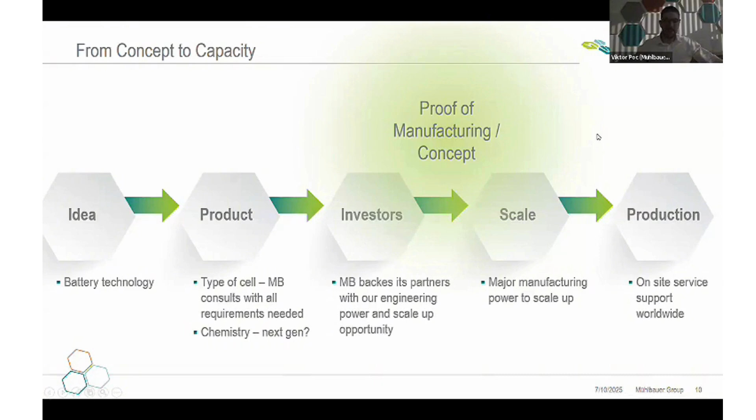So how we would like to fill up this gap in terms of, from the perspective of equipment builders, is we would like to focus on mitigation points within the battery production or the assembly of the battery cells. So I'd like to walk you through some of the main risks which we have encountered in the process of request to scale up some of our battery partners.

So at the very early stage, what we see in terms of process challenges is a lack of know-how, lack of experience of building the battery cells. Please imagine, we see a lot of partners coming with lack of experience in producing their own cell in high volumes. They usually produce the cells in a semi-automated fashion or even a manual fashion, whereas we are coming into the scale-up procedures given specification of the battery cell, but having no experience in actually building that cell.

So what we'd like to bring on the table is to offer all our equipment, which we have right now in our special lab, where we can cover all the processes of battery production, from notching until filling for pouch and prismatic, to basically showcase our partners that this is the way how we will bring you to the scale and to the target capacity which you require.

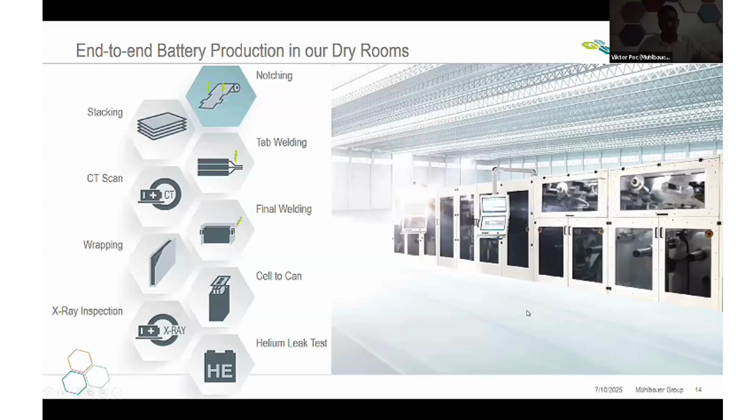In terms of stacking, by the way, just to not forget - all of what I'm going to say is available in production in our facilities. So don't misunderstand, this is not a presentation and a PPT, but those are real machines which are in production in our dry room.

In terms of stacking, we offer basically high volume stacking immediately, even for low volume production, so that we can witness how the stack is behaving, how the materials are behaving. We fine tune the stack to perfection, making sure the overall alignment of the electrode is precise enough, and how the wrinkles affect us when we create vacuum in case of pouch cells, etc. So what we are not doing manually, we do on a high volume tool to ensure that once we multiply this system, our OEE ramp up is natural.

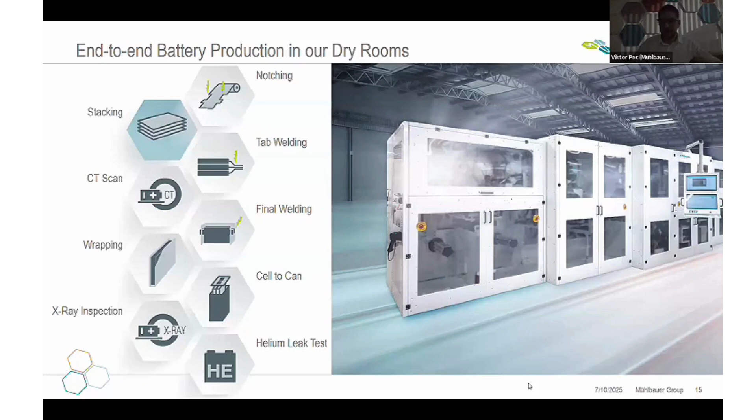So in terms of tab welding, we have encountered a lot of materials which are not even able to be welded in some cases. So this concept phase is definitely important - that we define the proper welding procedures. What type of welding do we use? Are we using ultrasonic welding? Are we using laser welding? Which type of ultrasonic welding sonotrodes are we using? These are crucial things, because when it comes to scale, if these processes are not properly defined, it can affect heavily not only the pricing and expenditures, but also the time, which is often crucial.

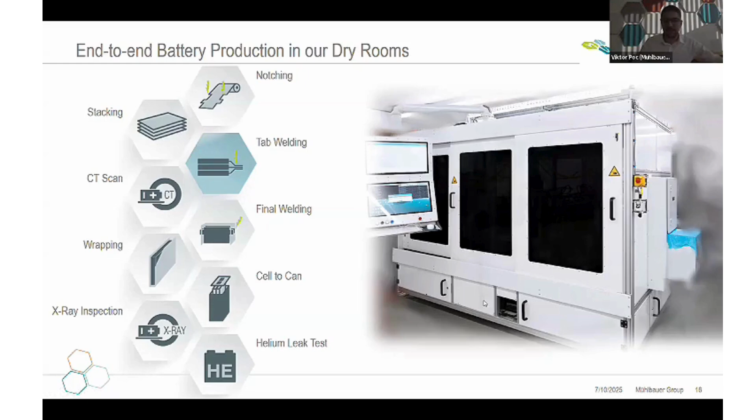CT - we definitely always like to include CT scan. We have inline CTs integrated, which allow us to check and control the stack quality. We count the sheets, we check basically all four corners of the cell in a fully automated manner, and we are able to integrate those in high volume lines as well.

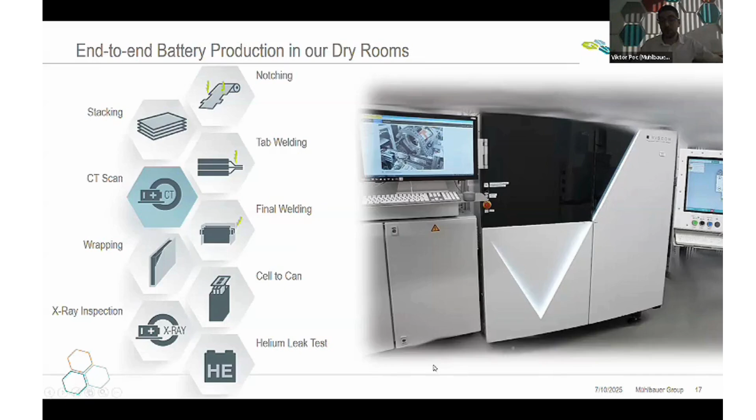In terms of final welding, again, absolutely crucial. Wherever welding is involved, we need to see the materials - we need to understand the behavior.

One lid is not the same as the other one, believe me. So it's definitely crucial that we can have that hands-on experience.

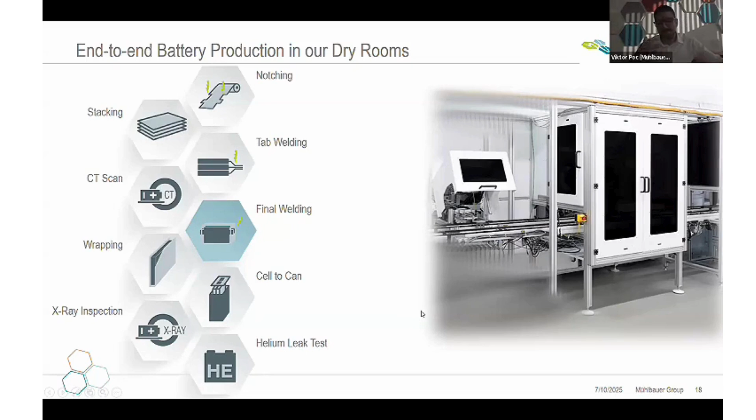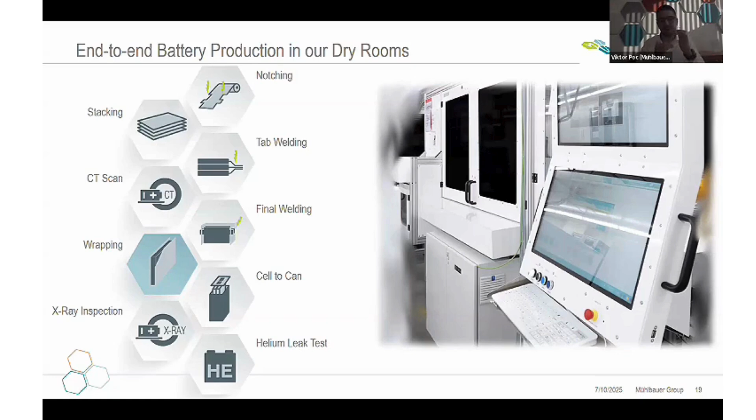During the scale-up, in terms of wrapping, pretty much same thing—Mylar wrapping or conventional wrapping. That's always something where we need to see the material. How is the adhesive behaving?

How precise do we need to be compared to the lid, which is already placed? Cell to can—how are we measuring the gap in between the can and the lid before we do the tack welding to precisely position the lid? We have unique camera systems which are actually measuring the gap to ensure that we are lasering properly, so that we don't have 50% waste, because having an NOK part in a cell-to-can module means you need to throw away at least 2 stacks if it comes to the more conventional cells.

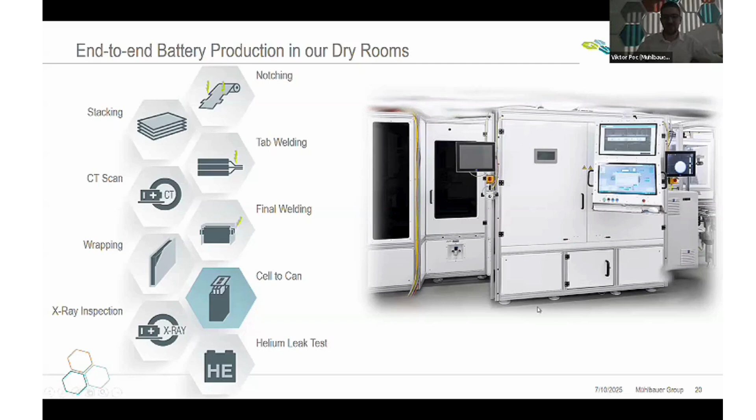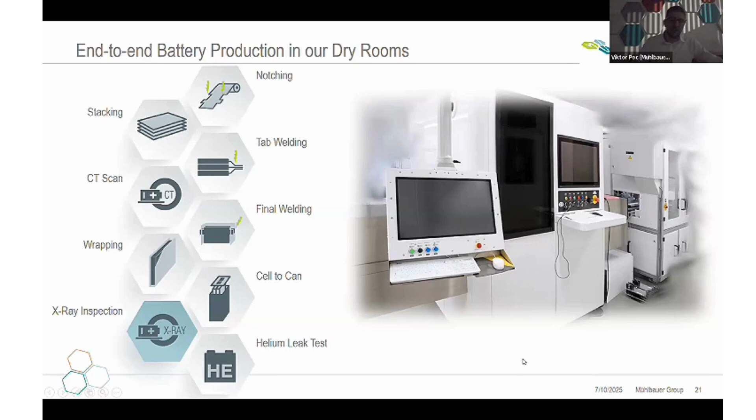So then obviously we integrate one more X-ray to really double check the quality of the cell, to check if there were no shiftages, etc. And we finish up with the helium check, where we basically ensure that there is no leakage in the unique chambers. All of this tooling is included in the dry room.

Basically the strategy is rather simple. For prismatic cells, we adjust the tooling to the size of the cell with a simple change kit, which then allows us to produce cells for our future partners. Same procedures we can basically provide for pouch cell assembly—deep drawing, sealing and packaging, degassing, filling, all these procedures we can have as well.

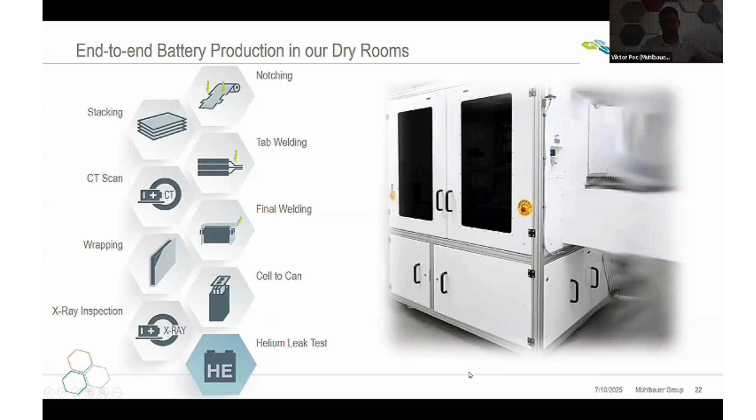So in terms of recommendations for the markets, concluding with a couple of sentences, I'd like to add that before, during the first wave I showed earlier, the trend from battery cell manufacturers was: we have the cell, we have the partners, we have the big OEMs covering. In the better case we have the orders; in worst cases we don't, but we're going to have those ones.

But here is a specification: we have the coverage of our investors, we need to scale—1 gig, 2 gig, 16 gig of equipment. Please scale up.

And I have to say that ourselves, we also did not realize, and we could not read, due to a bit of lack of experience back then, what is actually the know-how of our partners in terms of scale-up procedures—something we have not been able to identify back then, which we are able to identify now.

That's why we have added this intermediate step called proof of manufacturing, where we provide the opportunity for our partners to witness the scale-up procedure within our facilities, with our machines, our invested machines and infrastructure, the dry rooms—so that we can see together and have those learnings.